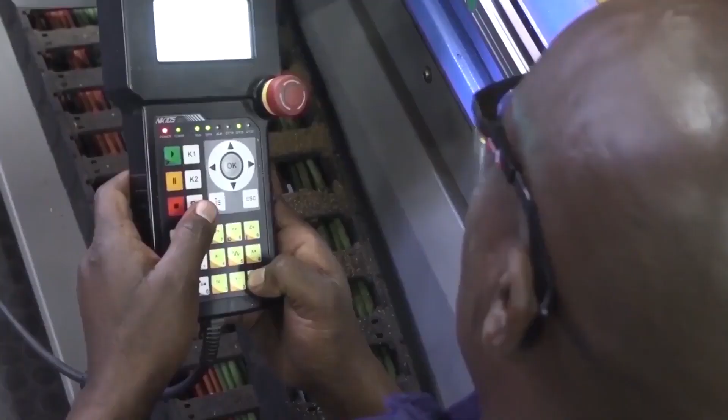Hey guys, today we're going to be doing some mouse pads. My customer has given me a range of different designs. He wants lots of small ones, some big ones for the whole desk, and we've got a whole bunch of designs to go with it, so we're going to be printing a whole bunch of different ones.

That being said, we're going to be using different machines today. First, we're going to be using our laser cutter, our sublimation printer, our double head heat press for multiple pressing, as well as our roll-to-roll heat press for our bigger items. So the first thing we need to do is get into our design and make sure that's all set up for the various machines we need to use.

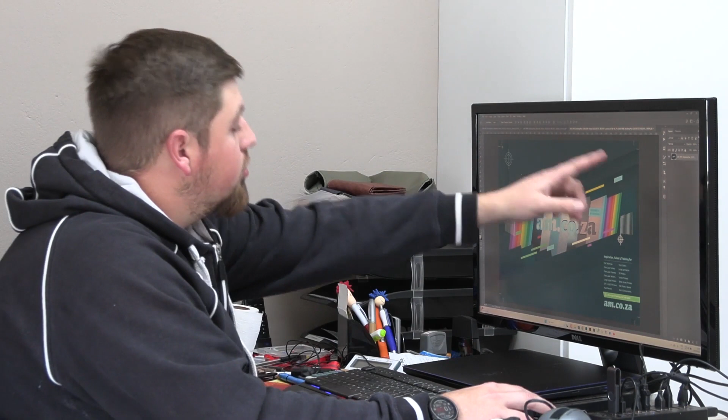So let's do it. So guys, we're here at our first design, and 10 points for whoever guesses who the customer is. So first thing we need to do is have a look at all the designs that we've been given, and there's only 3 of the smaller kind. So what I need to do firsthand is create an actual border that goes around so that we can create a cut line for our laser.

So the first thing I'm going to do is go ahead and use my rectangular rounder tool, and we're going to make it so that it's almost edge to edge with our actual cut lines, the ones that are on the corners, and that's our bleed line. I need to make this black line thicker. You can use black, red, it doesn't really matter. Change it to red so we can see it easier. And once that's done, all I need to do is now just make sure it's centered and it is equal on all 4 sides and not cutting in too far. So that looks really good.

Now what we want to do is we want the laser to cut the shape of this rectangle so that we can have a perfect shape. We're going to cut the mouse pad first, and then we're going to heat press it. It makes it for a much easier heat pressing, especially if you're going to use a double head heat press. You want to try and make sure that you do singles at a time and not try and heat press a big roll and then go and laser cut it afterwards, which is what we have to do for our bigger mouse pads. So now that we've got that shape done, we can go ahead and hide this layer, and now we're just left with our border.

Now you can either save that as a JPEG and then convert it to a DXF in your own program, but I'm just merely going to drag this across and dump it on my Illustrator. We're going to go and say image trace. We're going to say OK. And then once that's finished, it turns it into a black line, which is perfectly fine for me. I am wanting the inner line, not the outer.

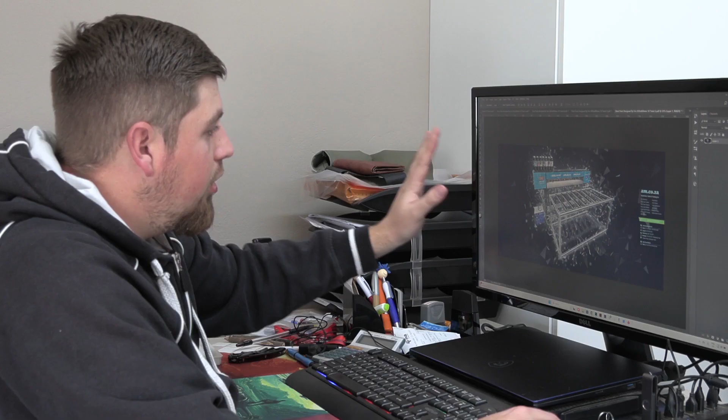I really thoroughly love this whole printer, the whole UV printer with the table, the chiller, the bottles of ink. This design is my favorite, so we're going to work on this one as a sample for the customer. Once they're happy, then we'll print and do the rest of them.

So that being said, the first thing we need to do for our large mouse pads is to go and print our paper, all the designs that we want, as well as the small ones. From there, I'm going to laser cut the small mouse pads before we heat press. For the bigger ones, we're going to have to heat press on the entire roll because it's such a big thing, we can't do it in our double head heat press. From there, we can go ahead and stitch it, but let's go and print.

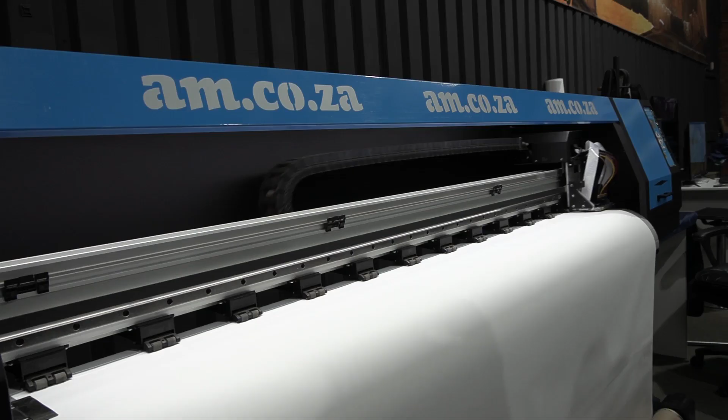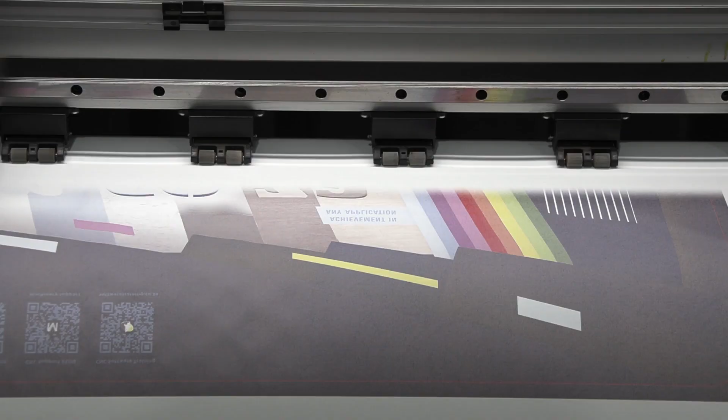When it comes to printing a sublimation piece, it is always better to have something that you can do bulk as well as 1 or 2. So for me, I thoroughly enjoy using my 1.6 meter AM sublimation printer because I can get a really good detail and print in bulk, as well as only needing to print one on the occasion that you're doing only one. Versus doing a desktop printer, you can only print so much and so big at one time. So this is purely a win for me.

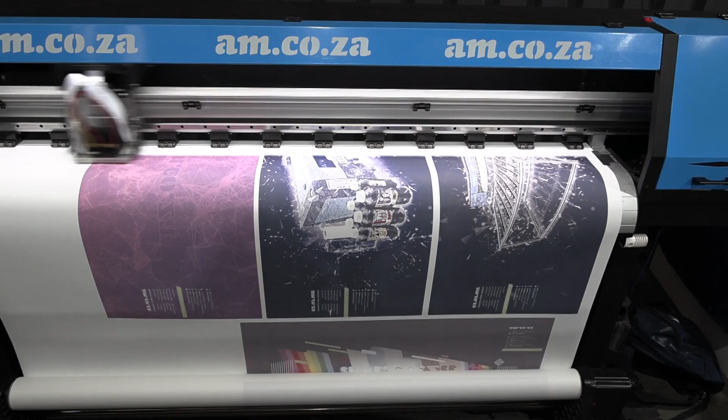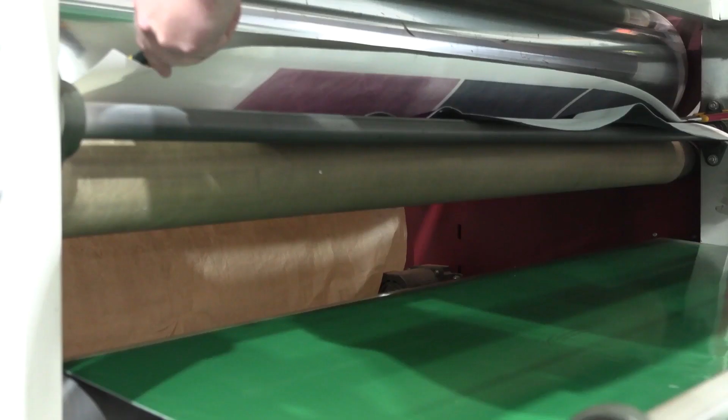In this case, we are also doing a much larger set of mouse pads. So for me, I would rather go and heat press it on our roll-to-roll heat press first, and then once I'm finished with that, I load it into my laser cutter and cut the edges off, which makes a much better finish for bigger mouse pads. But for smaller ones, it is definitely much easier to use a smaller heat press, and it just so happens I've got a double head heat press, which means I can do a much faster production.

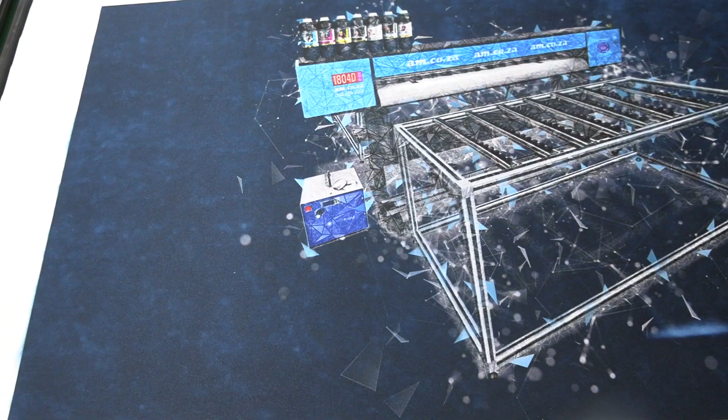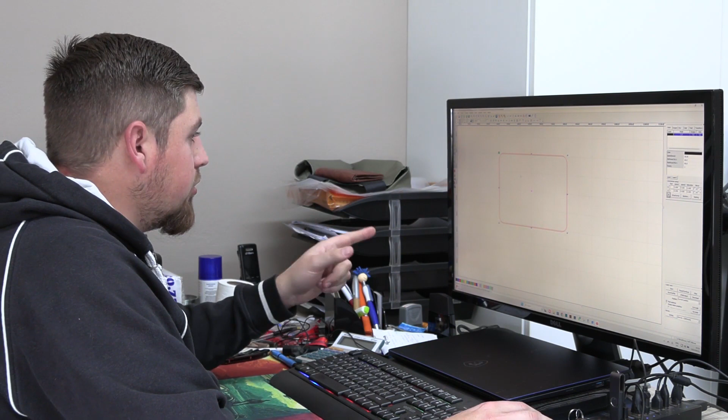Okay, so what I need to do here in RDWorks is create our cut line for both the big and small mouse pad, but I'm going to be doing the small one just to show you. Now earlier I said that there was a bit of a defect on the outer line of our mouse pad, so I want to go ahead, select this, we're going to ungroup it, and once I've ungrouped it, I want to delete the outer line because I want the inner line, which is more accurate and has less problems.

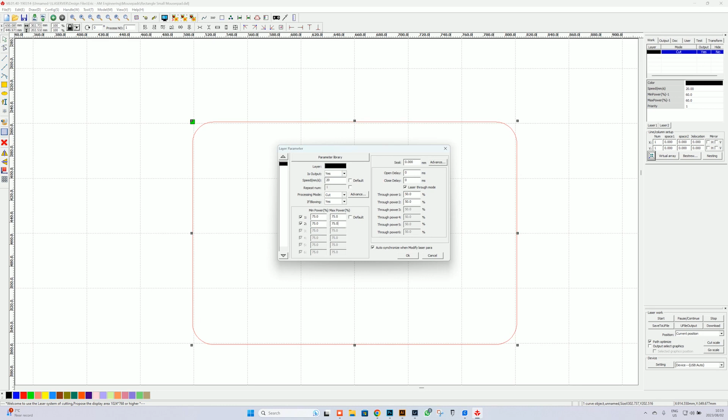Then we're going to quickly just make sure our settings are correct. 20 speed, and I'm going to take this to 75%. Change that to 75, 75, 75. Now that that's done, all we need to do is go ahead and save to U-file, which could be a memory stick, or you can download it directly to your cutter. And there we are. Now we are finished and we can go and laser cut our mouse pad.

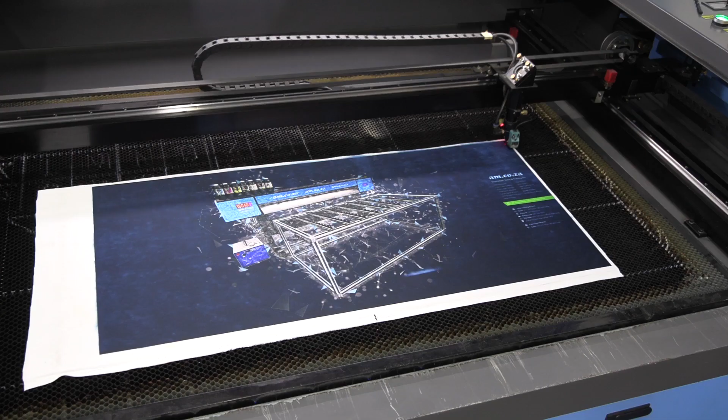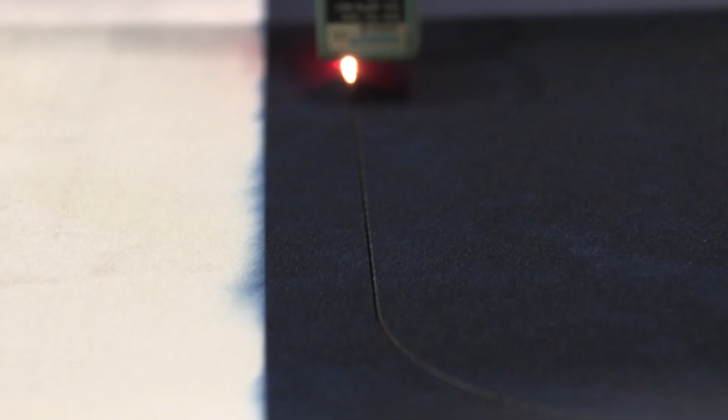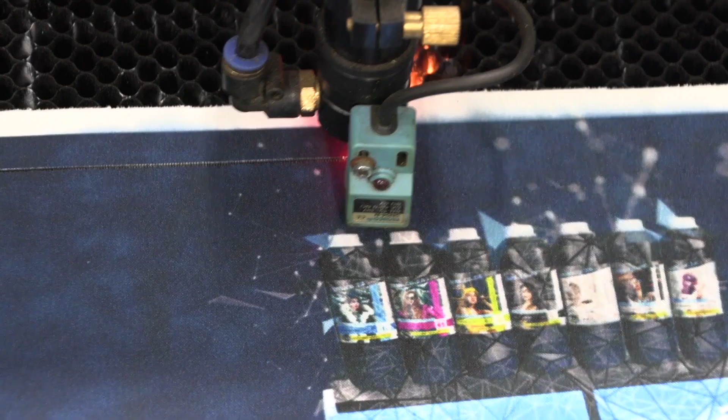Now when it comes to laser cutting the mouse pads, I prefer laser cutting them myself rather than buying a pre-cut mouse pad that you get off the shelf from certain suppliers. Now with the AM laser cutter that I've got, the cabinet laser, I have the ability to cut my own sizes as well as shapes, whether it be a contoured shape of my hand, for instance, if we were printing a hand. But when you're cutting the edge, it kind of sears the edge so that it doesn't fray as much as buying a mouse pad off the shelf.

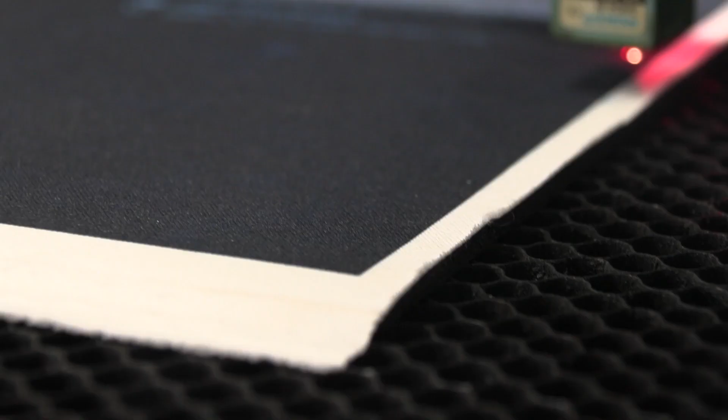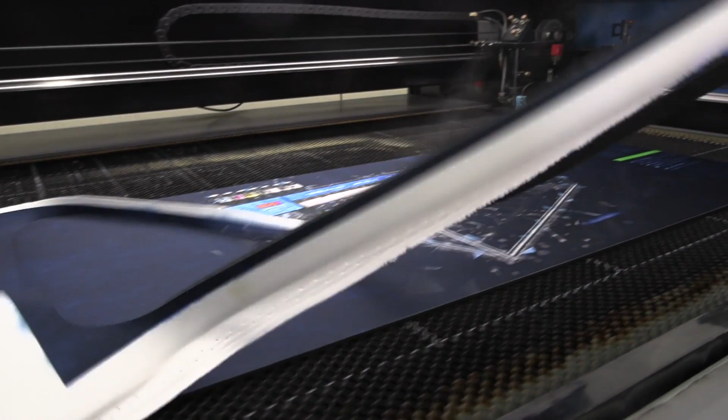So I don't like buying mouse pads off the shelf because a lot of the times the edges have already lifted and you've now cut down the amount of time that this mouse pad will last on your desk when you're moving your hand back and forth. That will eventually lift the first layer. Whereas if you laser cut it, you're actually searing the edge of that mouse pad and it prevents it from lifting for a much longer period of time. So being able to laser cut the mouse pad is very, very essential to getting a really good quality mouse pad for the customer.

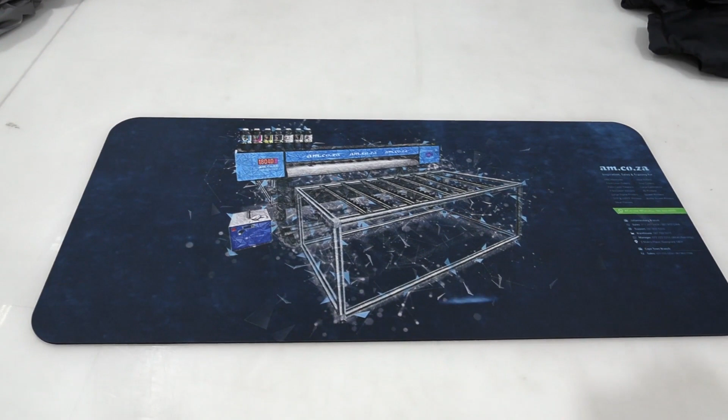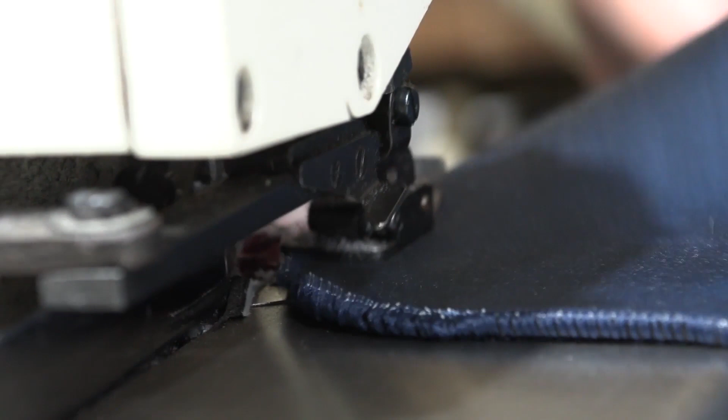Once we are finished with the roll-to-roll heat press on our big mouse pad, I am going to overlock and hem the edges so that it can be used for a much longer period of time on your desk. Because it's going to be taking up the whole desk mainly, you're going to have a lot of things that are on top of it. You might spill some coffee on it.

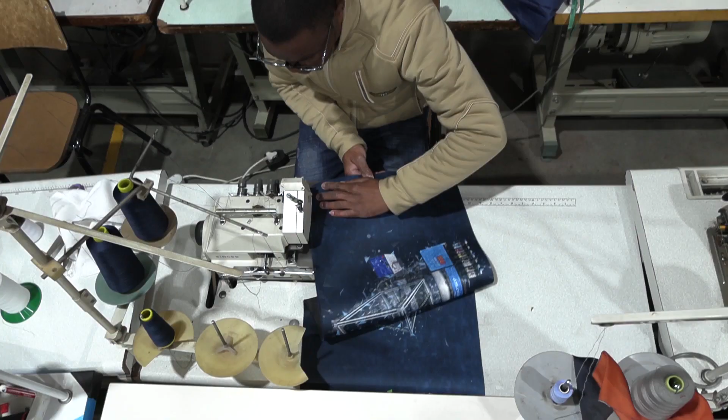That way you can roll it up, throw it into a dishwasher or washing machine, wash it, and because the edges are overlocked, it means that the edges will not lift or fray, which means that you'll get a much more premium, much better looking mouse pad.

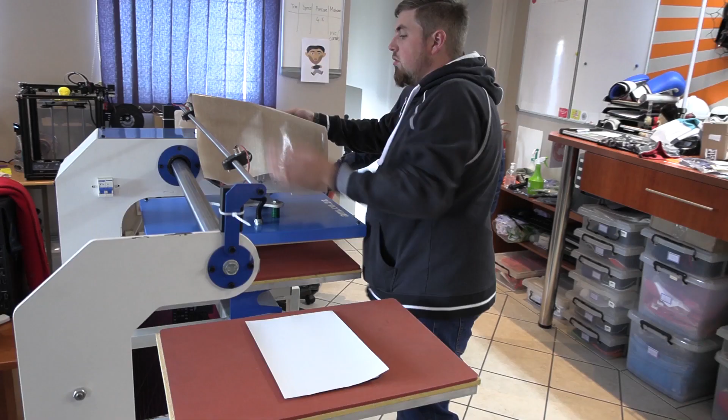So now that we are finished printing on our sublimation printer, we're going to take that paper, cut it up, and then we are going to line it up as best we can. We're going to use our heat resistant tape, which we get from AM as well. Once that is applied, then we can go ahead and heat press and do the bulk on the double head heat press for our smaller mouse pads, which is a much more efficient way than using a roll-to-roll heat press.

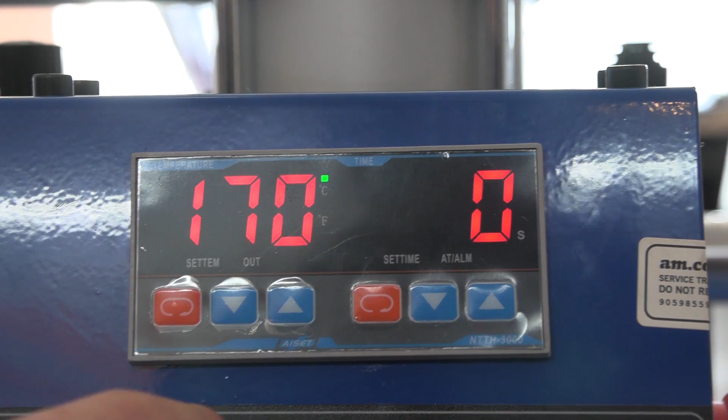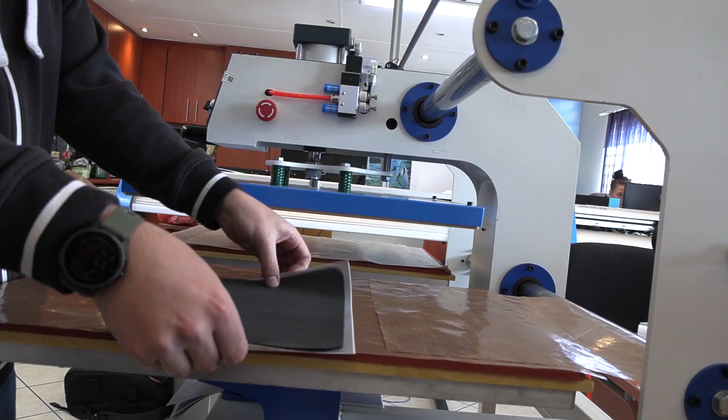When you're using the dual head heat press, you've got to make sure that you get your temperature and pressure correct. So we're going to be using a temperature of 200 degrees Celsius, and we're going to be heat pressing for about 90 seconds per mouse pad. Now, I've seen people use a much higher temperature and a lot shorter time span of heat pressing, but these are the settings I prefer, and it needs to take that 90 seconds for that ink to get everything as much as possible out of the paper and onto your mouse pad with best quality.

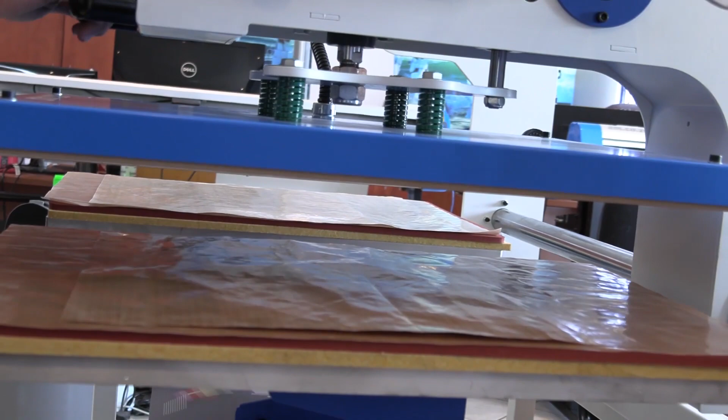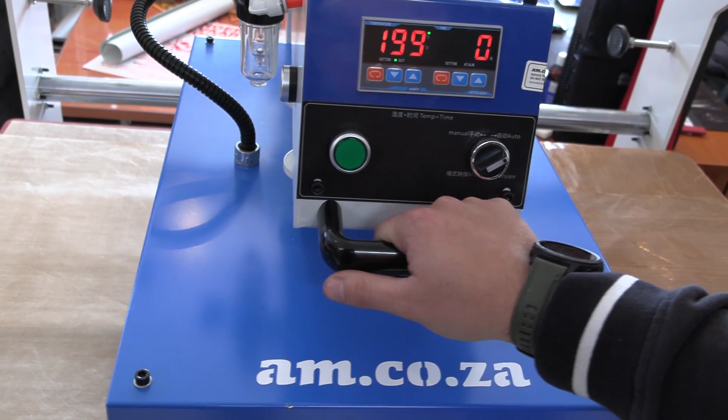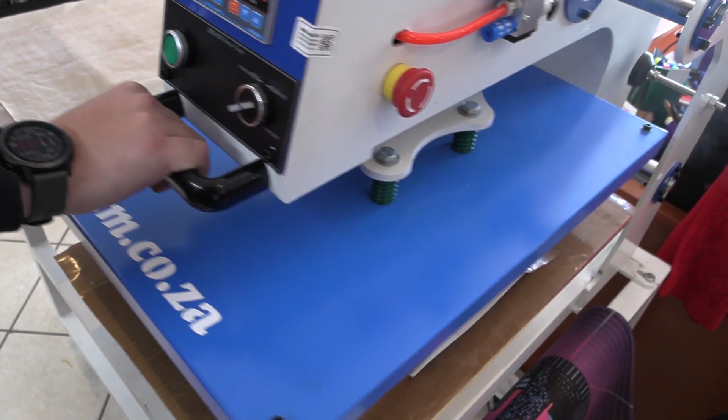When you're doing the adjustment of your pressure, you just got to adjust on the left hand side where your air adjustment is. If you're having a bulk order like this, do a small little test first. Make sure your pressure is correct before doing everything in one go, and having less pressure is better. The higher the pressure, the more likely you are to get ghosting, as the paper gets squished and slightly moves a little bit, and then you get that ghosted or double print.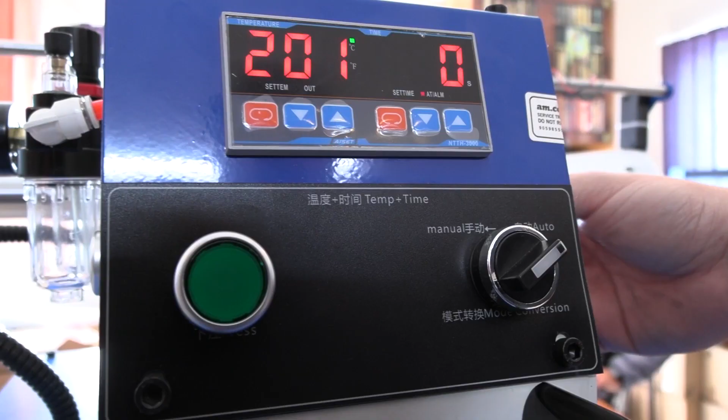Or if the pressure is too much, what happens is you get an ink explosion, which leaves you a line that looks like a flash of light has burst off to the side, and that is not something that you're looking for, especially when you're doing such big bulk orders. You want to try and get the pressure correct the first time, and then you know that you're set for the rest of the order.

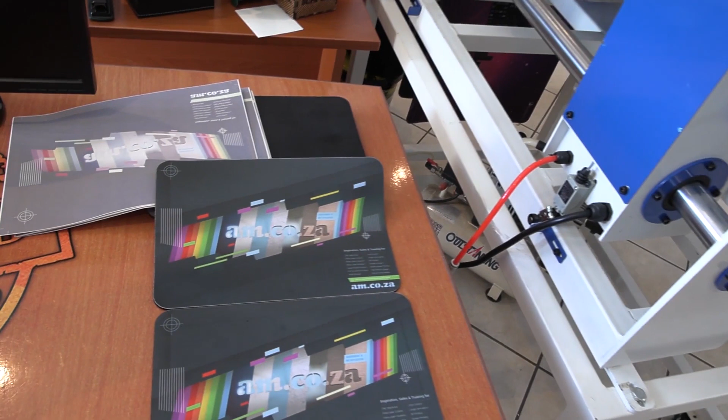Well guys, now that I've shown you how to make either a very big mouse pad or lots of small ones in a bulk order, as well as using as many machines as possible that you have from AM, it really does make a difference to get something this good.